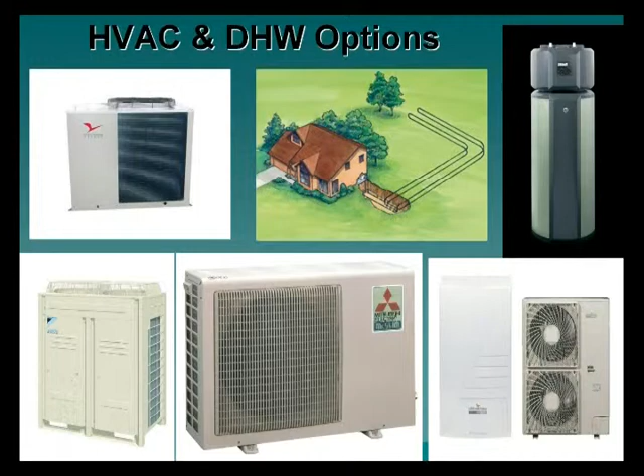The basic numbers here, your electric resistance. I want to bring in this term coefficient of performance, and it's basically how many watts of electricity it takes to get a watt of heat out of it. So electric resistance has a COP of 1. You put in 1 watt of electricity, you get 1 watt of heat out of it.

A standard air-to-water heat pump like General Electric is producing, you'll have a COP of 2, meaning it's twice as efficient as straight electric resistance, and that's till it gets to be about 47 degrees outside, then the COP goes down. Your standard air-to-air heat pumps, which have been sold forever in the United States, especially in the South, your COPs are in about the 3 range.

These new air-to-water heat pumps, variable speed inverter air-to-water heat pumps I mentioned in the very beginning, you're looking at COPs that, depending on where you are, on an annual basis can be anywhere from about 3 to 4.5, depending on how mild the temperature is. If you're in an area that doesn't freeze a lot, you can look at a COP sometimes approaching 4.

And then the last way to go is geo-exchange heat pumps, which we've been using off and on. We've probably done about 50 homes with geo-exchange heat pumps. The great thing about geo is it doesn't matter how cold it gets outside. You're going to have a COP of somewhere around 4. So in places like Lake Tahoe and other mountainous areas where it gets really cold, geo has some advantages.

But these new air-to-waters are so efficient that in most climates in California, the efficiencies are about the same, and you don't have to go through the complexity and the expense of a geo system to have the same efficiency.

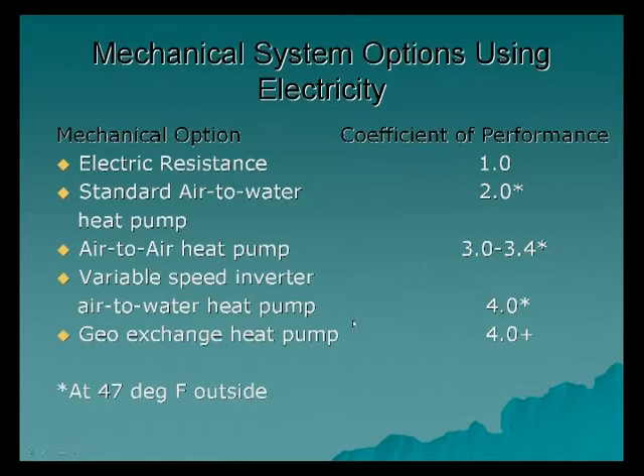The first of the air-to-water heat pumps that's coming on the market is made by a manufacturer called Daikin. Daikin is the second largest manufacturer of air conditioning equipment on the planet, next to Carrier, and they're just now coming to North America. This unit, which is called the Altherma, they sell about 50,000 units of these a year in Europe. And what's great about them is, again, high COP using ambient.

The COPs are usually high down to about 32 degrees, and they get a little bit less from that. These units are efficient, flexible, quiet, and reliable. They've installed 16 of them up in Portland, and I went up to see them earlier this year. Very quiet. And now the downside to these things, not really a feature, it's just one of the concerns, is the hottest water they'll produce is somewhere around 123 degrees.

So when you use it for space heating, be it radiant or fan coils, you've got to be very careful with the design, but it's doable. And like I say, they also produce the water for domestic as well as chilled water. They're reversible. So in the summertime, you can reverse it and send chilled water through a fan coil to get cooling and other options. It's a very nice unit.

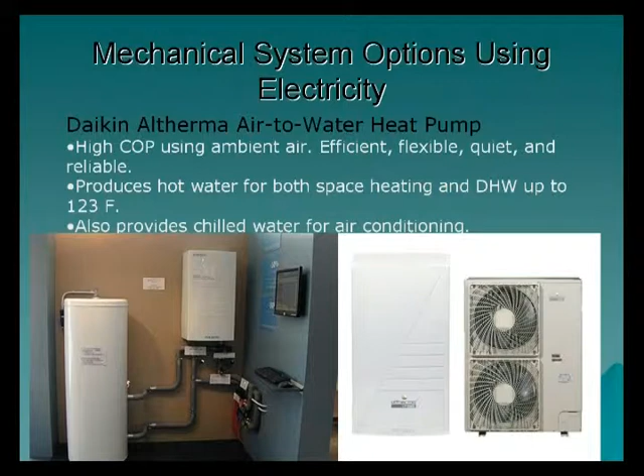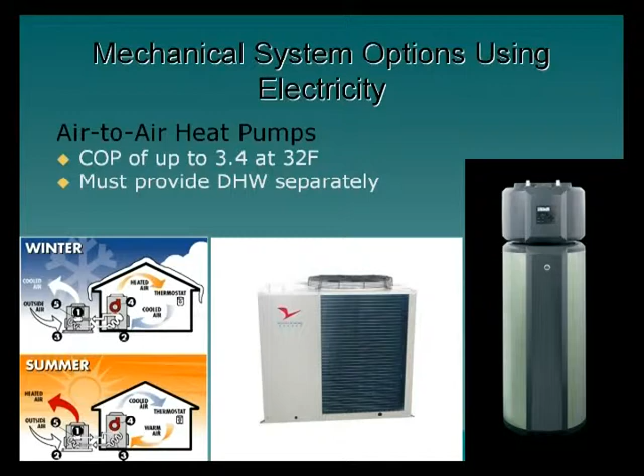Your conventional heat pumps, again, COPs usually up to about 3. And again, you have to then match them with an air-to-water heat pump like that. And then you have your geo systems. And geo is very popular in areas that have harsh climate and cheap electric rates. In California, we don't have either. We have high electric rates and mild climates.

But with the advent of very inexpensive PV, it's certainly possible to do a net zero energy house with geo, and it's probably a good idea if you're in a place like Lake Tahoe or other places where it's really, really cold. But in most of the mild climates, I think you're going to see the air-to-water systems taking over. In general, with the geo systems, you have 2 different types.

You have your horizontal beds. To get a ton of air conditioning, you need a 2-foot wide trench, 5 feet deep, and 100 feet long per ton. A ton is 12,000 BTUs. And usually space the trenches about 10 feet apart.

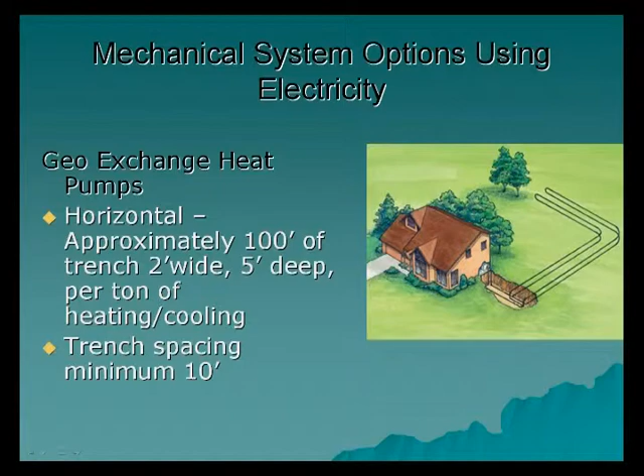More conventionally, you have what we call boreholes, and again, to get a ton of cooling, 5 inches in diameter, and again, spaced at about 10 feet. The systems are not without their complications. Not many mechanical subs are doing them, but the nice thing about them is they're very quiet outside. The Altherma units are also quiet, but these units are basically silent outside.

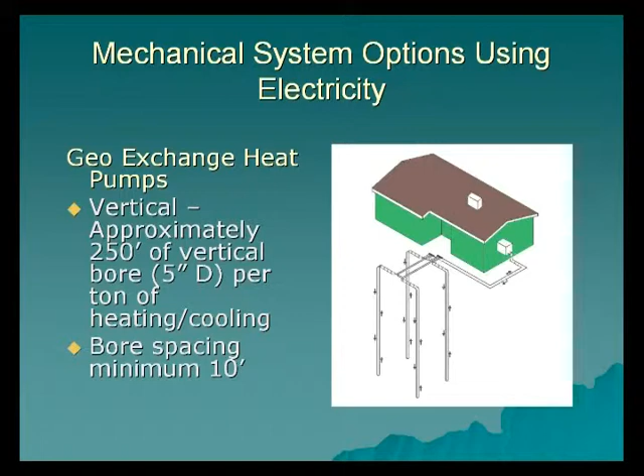One thing to keep in mind is with the air-to-water heat pumps, if you do have floor heating, you are limited to about 123 degrees, and therefore the aluminum-based floor heating systems, Warmboard, EcoWarm, Thermal Board, will work a lot better than your Gypcrete systems, and certainly a lot better than joist heating systems, where we're trying to go underneath the subfloor. Those are going to be very difficult to match with these air-to-water heat pumps.

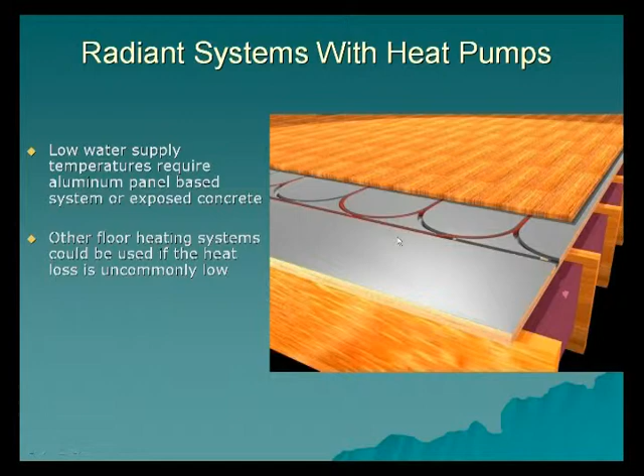Okay, I have several case studies for you. And I think you'll see that I've done 100 projects in '09. We hope to do at least another 100 this year, of all different styles. And the nice thing is that about 50 of those are under construction, and at least 25 of them should be done in the first quarter of '10.

All right, the first house is a house in Santa Barbara, 2,948 square feet. All of his appliances were Energy Star. The guy wasn't a big fan of LED or fluorescent lights, so only 25% of his lights were high efficacy. The rest were incandescent. Wasn't a particularly well-insulated house. R19 ceiling, and I can't remember if it was 2x6 or 2x4 walls. He did buy very good Energy Star windows. Didn't pay extra for them, but did get nice Energy Star windows.

He was putting in an air-to-water heat pump. The size of the system required to do the entire house, 7.3 kilowatts. The system was going to take up 412 square feet of roof, and the after-incentive cost was $20,000. Added to his mortgage, $113. The standard operating cost for this house, without the solar, just a standard house in Santa Barbara this size, would use $289 a month of energy.

Keep in mind you have to make about $400 to pay the utility company $289, so he's saving $250, $300 a month right off the bat. His after-tax savings per year were $4,600. So his payback is a little under about 5 years. The other thing in savings, people are very concerned about the carbon dioxide gaseous emissions. This house over a conventional house, same size, built in Santa Barbara, will save 10,146 pounds of carbon dioxide gaseous emissions per year. And that's with his $20,000 investment.

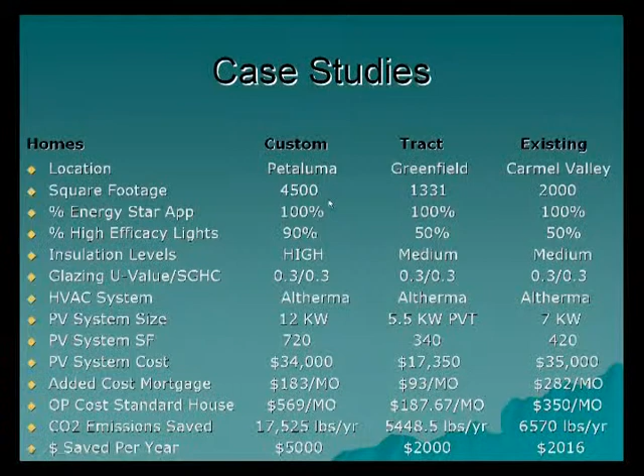But these are just similar projects. The first house we did was a house in Petaluma, and what really made a huge impression on us was just how cost-effective the system was. Really, the bigger the house, the more cost-effective the systems are. But I've got case studies you can take a look at on the website.

This last project we did was an 8,200 square foot house in Carmel Valley, a nice big house, but to add this system to his mortgage is going to cost him $338 a month to be net zero energy, 20 kilowatt system, big system, and he's going to save. His standard operating cost for a house is